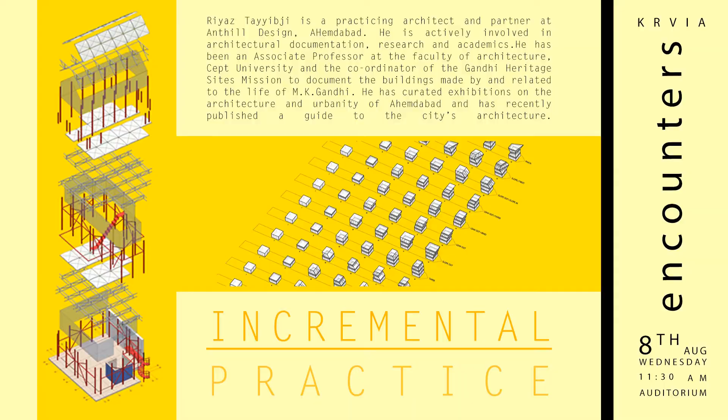With us, Mr. Riyaz Tayyibji. He is a practicing architect and partner at Anthill Design, Ahmedabad. Anthill Design is an architectural design firm based in Ahmedabad. It has built across India in a large variety of places with different character, culture and landscape. It is deeply involved in the design of buildings that belong to the place where they are built and emerge from the specific patterns of how they are to be used.

Riyaz has been instrumental in rooting the firm's practice in the documentation and research of architecture and urbanity. He is also currently conducting bridge studio faculty for the 5th year. I now invite Mr. Riyaz Tayyibji for the presentation. Welcome to KRVIA.

From guys I know very well. Thank you so much for this invitation. It's a pleasure to be here. I've been having problems this whole time with formats. You know, it's really funny. I was telling Pinkish that the day after you jhap your class for late submission, that's the day that your file decides to take revenge on you.

Anyway, what I would like to talk to you guys about is a little bit about what we do in our office and the kind of engagements we have. A little bit of background: I graduated from the School of Architecture, CEPT Ahmedabad, before it was a university. About the time that we graduated in the late 90s, there was a shift happening that one could not have known at that time. It was common at CEPT to take 5, 7, maybe 10 years to do your thesis. It wasn't unheard of to take 17.

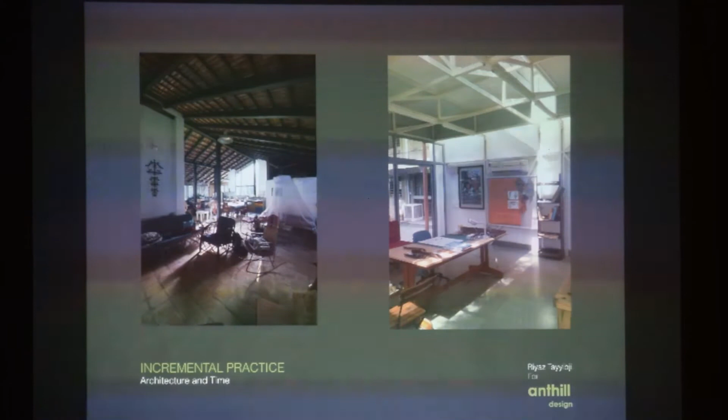And this is all the other architectural values that one still holds good, and is still what you're interested in: the quality of light, the material, the sense of space, all those things I'll take for granted when I'm talking. We all as architects will have our own sensibilities, but those are the essential parts that one is concentrating on, irrespective of how complex the brief is, or what the client's restrictions are. That quality one is still after.

This was how we built initially. Actually, what we did was we built just the first level of increment, that the house, the jhopdi, just became a kind of pavilion. I'll take you to the plan. If you see the organization of the plan, you've got two rooms. You've got the room on the top, and actually just in front. Yes.

So if you look at it, this is the main house. That's an annex added even later. So you've just got one big bedroom and study with a toilet, and then you've got a store here. Originally, this was all open. All of this was veranda. So about 60 to 70% of the house was veranda. And what my mother would do was simply collapse the house into the bedroom, collapse the kitchen into the store, and the house would just remain open. And everything that needed to be locked would go into those two rooms.

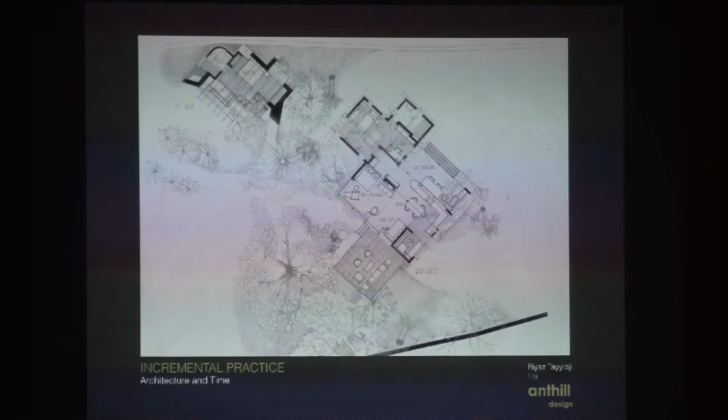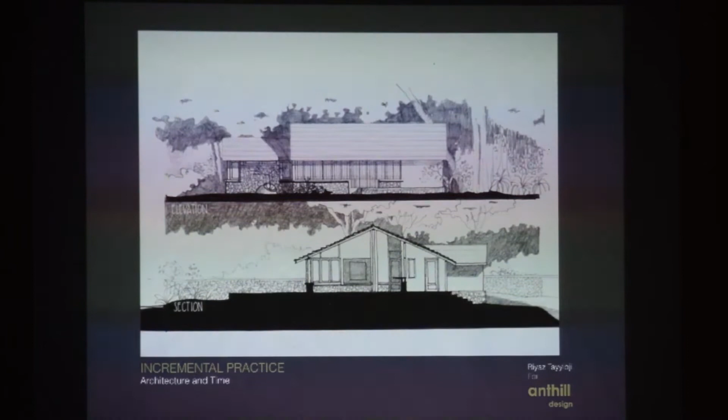And then over time, we added windows, we added doors, we added various other elements, grills now, because there's a lot more density of people in Alibag, therefore security has become an issue. These were the drawings that we made at the time. And we added an annex. So over time, as we've had funds, as investments have fructified, we've kept adding to all of this.

But the kind of sense of space that we were interested in, the kind of construction system that you can see, actually was learning from Ahmedabad. In the old city and in many parts of Bombay also, you find what we call Kulia Pakri, which is like you put steel girders and you simply put Kota stone or Shahabad stone on top. It's a very desi kind of way. So we actually did it with wood and Kadapa stone.

And the entire joinery came out from the fact that I wanted this forest of columns. The forest of columns actually came from the way that the grills and the jhap of the jhopdi was made. The jhap of the jhopdi has this kind of sense of light that comes through it, which I wanted to somehow abstract and bring into the space of the building. Sorry, I think I missed a couple of slides here. But even the kind of grills that we've developed for this project have that sense of a screen.

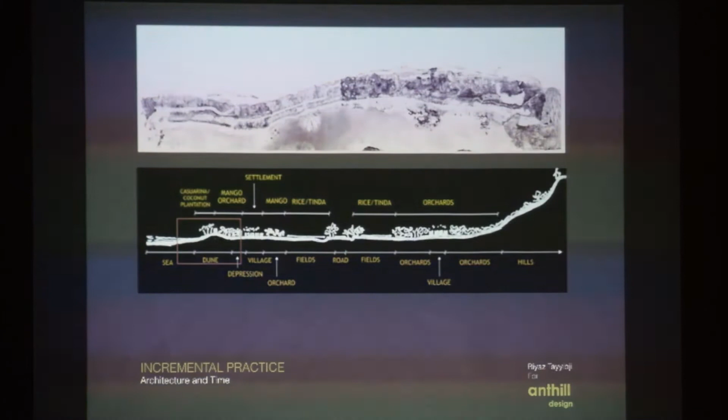And what we found about even the colonial houses that were existing there before us was that the Brits really understood how to site a house, whether it's on the dune, on the flat, in the orchard, or in the plantation, and that the way they site a house makes connections between these. And wherever we've had projects, one of the things that's interested me is to document and research its surrounds during the 1.5 or 2 years that we are doing a project there. So you will see this both here and in the other projects that we do.

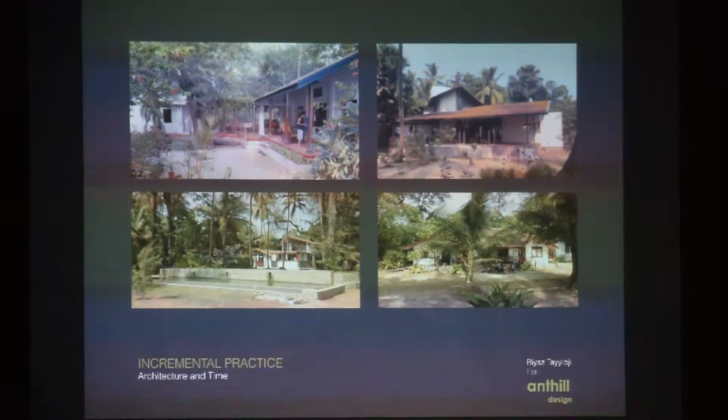And yet, I don't have the time here to get into detail. Each of these is a development of that particular idea of the verticality, the forest, the sense of light, and of course the tectonic details of how you put two materials together. So when I'm talking of incrementality, I'm talking about doing little bits. You're doing things at the level of detail, at the level of the plan of the house, at the level of the landscape, you're engaging in different ways. Not all of it makes sense at that time, you're just following an interest, and you're beginning to see this pattern come together, at least for you.

And you might ask what's the relationship of incrementality with something like, let's say, infrastructure, or something that's not necessarily domestic. And we were also asking that question, whether beyond the domestic you can really use this idea of doing things bit by bit or layer by layer over time. And this very interesting project came a little bit further south. This is a creek near the village of Thal.

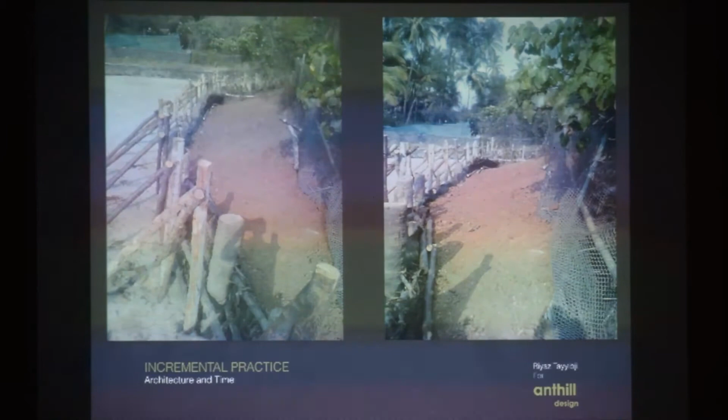So how do you then save the land? So we tried this incremental approach again. What we did was we built this kind of truss, a kind of a fence made with a truss, and we lined it with what you can see is an agri-net and some mesh, and we just grew stuff that then would harden over time.

And unfortunately, I don't have the latest photographs of this. As you can see, we are not very strong on documentation. But we planted mangroves and all kinds of cacti and various kinds of water plants. And now it breaks the force of all of that. So it made us think that it's possible to deal with even larger issues of erosion and things that one would do with very hard materials in this time method, and perhaps there's an ecology and one can develop that way of thinking. So this is where we were.

Now simultaneously with this, in Alibag we are dealing with these light materials, verticals, wood, timber structure, this filigree of columns that I was telling you about. And simultaneously in Udaipur, we had an English client who wanted to build in the early 2000s what he called Eco House. At that time, sustainability was a big buzzword, it still is. But at that time, there's a lot of energy about doing things in this manner. And it's partly at that time that we gave our firm the name Anthill, with all those ecological ideas in mind.

And this project required, I mean, he wanted to know where energy, embodiment, all of that was going into the building. And so we built this with local craftsmen that we started working with. We actually set up the team that constructed a large part of this house. But it was still a very technocratic sustainability that he was interested in. Being British and from Europe, he wanted solar cells and renewable energy, windmills, and all that. A lot of that stuff we didn't implement because we were able to do some of it passively.

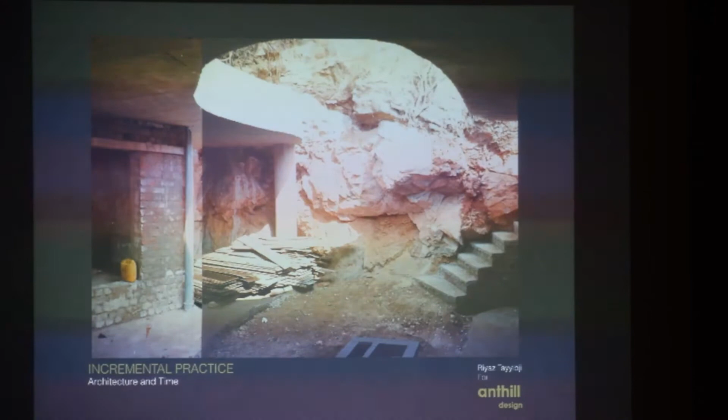So what we did was we played between these very orthogonal buildings, which sit against the rock that we were excavating, and then you get the light and the play through that. And that's actually how the house sits. You've got the servants' quarters over there, you've got this steep hill going up, and that's actually a very interesting device that we designed, implemented by a mechanical engineering company from Bombay, in fact from Vadala. It's a lift that moves vertically and then diagonally up and takes you to the house there.

Moss was about 65 years old. And Mr. Moss started this company for which we did this, called Moss Energy. And it was actually a very interesting story. He and the Maharaja used to play cricket for Cambridge together. And one day Malcolm was standing at the City Palace and complaining, like many firangs do.

At that time there was a diesel-run boat that used to take you from City Palace to the Lake Palace. And it's like, you Indians, you'll screw up everything. You've got this fantastic heritage site and you're all screwing it up with this terrible sound and all. Why don't you at least do some solar boat?

So the Maharaja, no less, saying, you firangs come here, white skin, you'll say anything, you know nothing about the kind of resources we have. If you want to do it, you do it. So this guy took it personally. He had a multi-million-pound chemical company in Surrey, which he sold. He started this Moss Energy and he landed up and decided to live in Udaipur.

And for 5 years, if you do a Google, you'll know there was this solar car rally that used to take place in Rajasthan every year, which was actually run by Malcolm. And in fact his sons, who were 13 and 18 at the time, used to build their own solar cars and take part in the rally. So those are the kind of people we were dealing with.

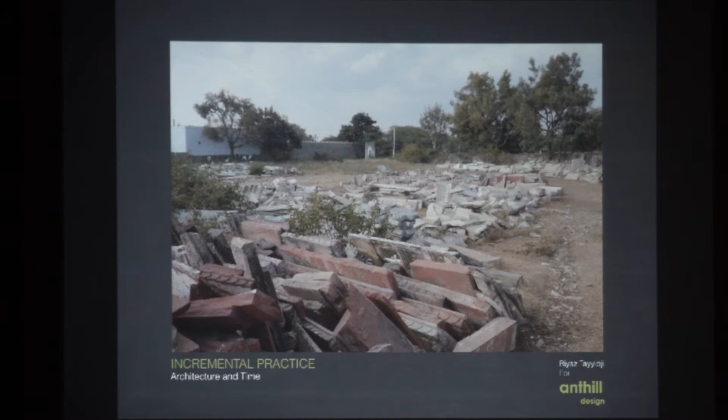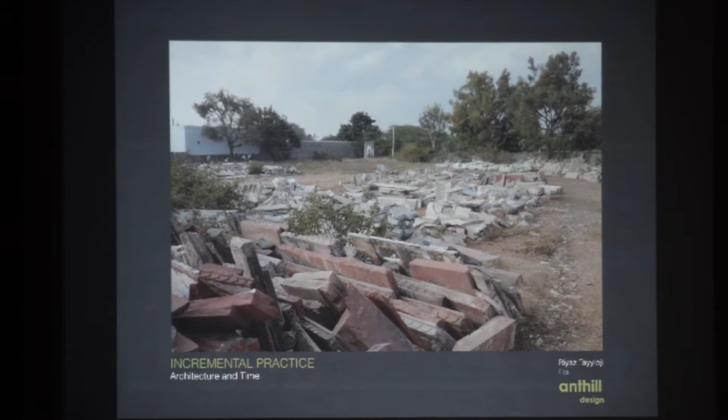There was news that a fort in Madhya Pradesh had fallen, and there was this beautiful patina stone that the government was selling. Some of that stone is about 450 years old. John sent 60 trucks, and we got it all ferried up here. That's the speed at which they move.

Now, when we wanted to do landscape design here, he just bought the whole nursery in Pune and transferred it to our site. So then you're doing mix and match. So then you're like, you guys want to work with Photoshop? This is the real deal, man.

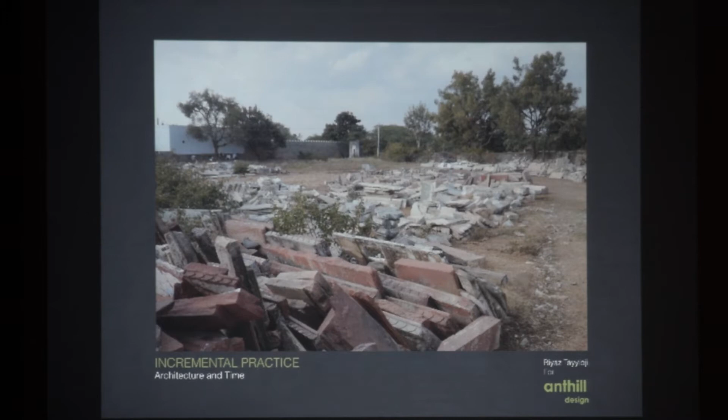So this is some of the material, and a lot of this is now in a nice shed, and there are some elephants which are about 3 meters high, all in one solid block of granite from Mughal times and so on. I'll tell you some of the most surreal things that I've done with John. I've actually had wine in Badshah Akbar's Belgian wine glasses. I'm not kidding you. This is the kind of people, absurd people.

Now what do you do? Do you say you will not work with this? On the other hand, as I told you, I come from CEPT, I do interpretations of Jarokas, I don't do Jarokas. And then you're confronted with this guy who has only Jarokas. And lots of them.

And so his thing was that he also bought very small B and C grade heritage properties from Delhi, all the way down. If you look at the tourist map from Alwar, all the way down to Udaipur. So that if you've got a fancy guy who wants a boutique hotel, you could have 10 stops, see all the great places in Rajasthan, and stay in John's hotel, and you get a package deal for God knows how much.

But what we needed to do was therefore have a hotel or a hospitality project which was modern but used all these old materials. And on some of the sites we had very beautiful old buildings as well, but very small, and therefore not on the radar of the heritage community. So the site that we worked on was a small hunting lodge, which is actually only maybe 15 feet by 20 feet, with a small aula, what they call, and a tower and all of those kinds of things.

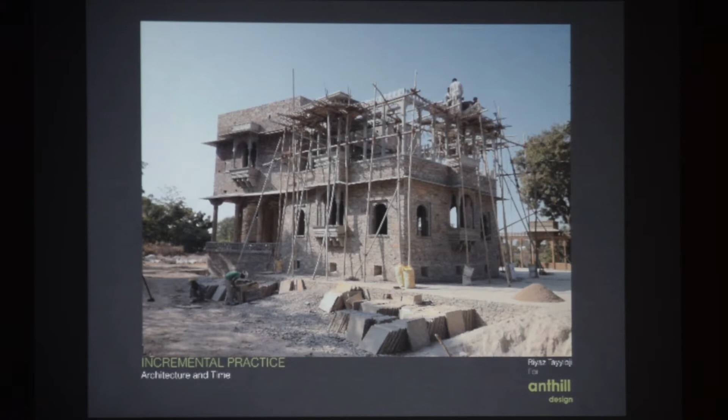And like I said, there's an ethics that's involved here, and I question it all the time, and I'm open to discussion about it, because you have different takes on it. I don't think that I would have been able to talk about a lot of the dimensions of architecture that we do in the office now had we not done this project. So anyway, this is how it's going. But the level of craftsmanship and the level of detail and the level of finesse that we've been able to achieve there has been very, very satisfying.

So this whole composition is actually the entrance to the hotel, and that's it. So it's still going on. We're doing landscape and we're adding rooms to it now. We've got a modular kind of hotel which we can add rooms to every year. So when John has money, we build. When he doesn't have money, we are on hold. So it goes on like this. This is a much more refined version of that incrementality that I was telling you about, because we put in the craft system, we've got the economics worked out with him, we've got a system of drawing this incrementality, not drawing this incrementality in the office, the way that we work. It's got a system of its own.

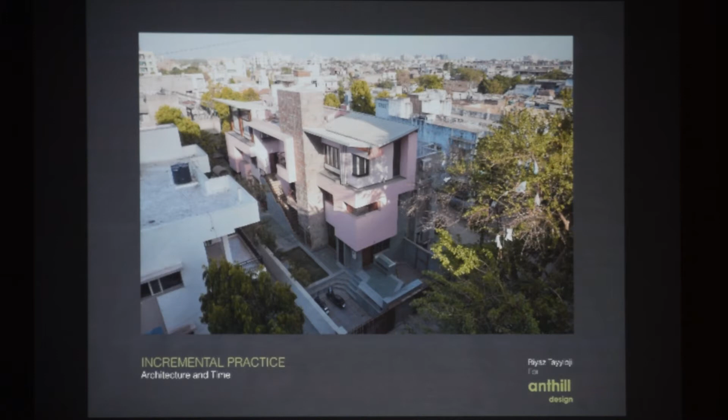Now, this is something that I know quite a few people are interested to know about, this pink house that we did. So simultaneously, we're doing urban projects where the nature of the project cannot afford the kind of incrementality and time that we are talking about. This was a very interesting project, again, which had great feedback, and we discussed it in class yesterday. The client came to us. It's a very, very tight site. It's a long linear site. It's about 27 meters by, I think, 3 plus 6, so 9 meters wide. So you get a footprint of about 21 by 6 in metric terms, and it's a common wall.

So these are Bank of Baroda staff quarters from the 70s. One was broken down because it was too dingy, so light was a very important part of the reason that we were rebuilding the project. The clients were extremely faithful followers of Sathya Sai Baba, and initially the project that came to us was retrofitting the old Bank of Baroda project, and they went to ask Baba about what they should do. And they thought Baba would say, simply rename the house. He said, no, you have to build Sai Naina. And that was the indication for them that the old would not continue, that something new needed to be made.

So we demolished the house. It was nothing to do with architecture. It was a symbolic move. And I was telling people that I'm reasonably agnostic, but they were very close family friends from my wife's side.

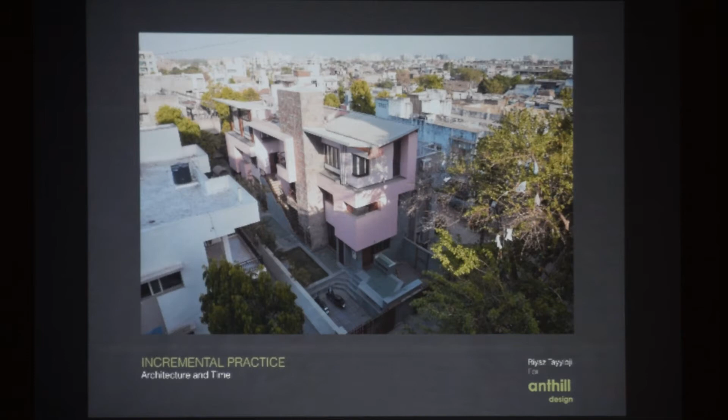And so they went to Baba for the brief as well. And Baba gave us the brief, I kid you not. He gave us five points that we had to follow. And some of them were reasonably sensible. The first one, he said that the plinth must be 5 steps up from the road, which seemed good. It was a low-lying area, there's a slum nearby, there's a lot of water collection. All those things work.

He said that the building must be predominantly baby pink in color. And he said that because the house was to be designed for Naina Aunty, the elevation must have an eye motif in it. And the house must have a lift, and the building must be lighter as it goes up. And the way that he actually told us that the building should be lighter is that the satsang or the bhajan area should be on top.

So it made complete sense in earthquake terms that the higher you go, the lighter it gets. The larger spans are on top, the smaller spans are below. So apart from the eye and the pink, everything made reasonable sense. But there was no question of arguing on this. And this is the crazy thing about the symbolic value of certain things. You can talk about function, you can argue about program, you can even talk about a particular detail in rational terms. This cannot be argued about.

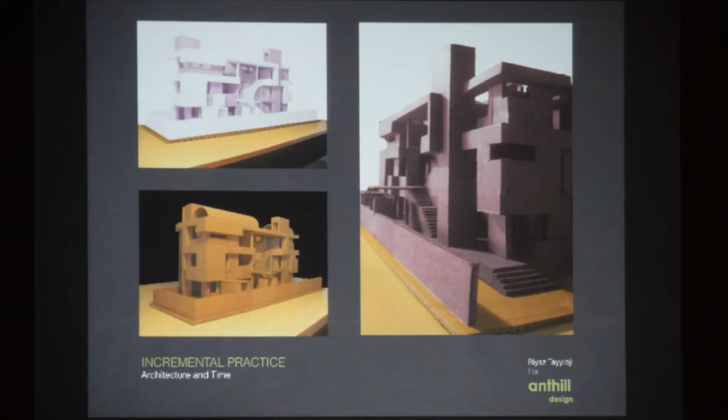The other exercise we did was that we went around Ahmedabad and looked in the neighborhood of our home and our office, and almost 50 to 60% of the buildings were pink. And if you actually look around, even in Bombay, you'll be surprised when you look closely how much pink there is in the world. Anyway, we made all these models, monochrome to start with because that's the only way we know, and then we Photoshopped it to see what we could do.

And just so that we get into the plan, Roma came up with this idea that we are not going to do this motif without it having some kind of functional or programmatic idea behind it. So she took the idea of the eye and the aperture that we were supposed to do and embedded it into the staircase. And because of the 2 flights, it gave us a depth to play with the aperture of the opening.

And then because the section of the staircase shifts, we could use the aperture to bring in light in different ways. So we started looking at the eye as a device for bringing in light rather than just a motif that you stick on the facade. And what you see over here, the staircase and that opening, is what the eye became. The house was actually designed for ground+2, and the entire top part was made out of recycled wood from Alang.

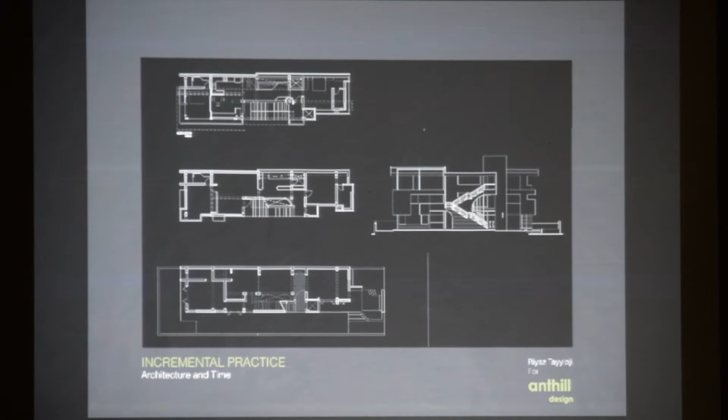And we realized that with the kind of cost we were working with, because we were getting a very nominal fee for this, unless we built it ourselves, A, we would not be able to afford doing the project for our client, and B, the project itself wouldn't be buildable in the cost if we got a full-scale contractor to do it. So that's the eye window that we worked out, and it brings in light in this manner. So this is from inside.

You can see there's this double height slit going up, which is actually the bottom of the top flight of staircase. What we were able to convince them to do is to leave the staircase outside. So you actually go out of the house to go up. I'm just saying, in programmatic terms, that was very, very important.

And yet you have a kind of imagination of the whole house working as one space, even though you can actually partition off each floor as a separate apartment if you wanted to. So they do live as a joint family. So for us, partially the question was, if you're in a joint family, how do you have a sense of the whole house?

But if, let's say, the two sons are living separately, how do they get their sense of privacy and the separateness? If you want to give the top floor out on rent, how do you do that? And the external staircase worked really well for all these kinds of things. Which means you just go out of the main door and up. So internally, everything feels compact and complete, but the house kind of connects.

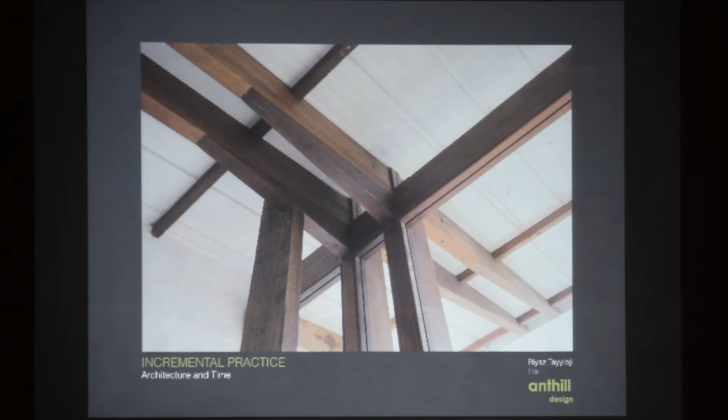But also then, because you have the workshop and your office is in the workshop, you have this level of control on the kind of wood you want to put together, the textures that come together, the way color comes together, the way joinery works. All of that you have a very close contact with. And also you're seeing patterns in the workshop that are then affecting the way that you work and design. And that's how our office looked for a very long time.

So we actually left Center Point, which is when office was house and home, and we went into this industrial area. And it was fantastic because of all the guys around us. Later some of my students started what is called the Clay Club, now doing very well, which was just two galas down. And they were doing stuff with ceramic and all kinds of clay stuff, which you can then plug into and design with.

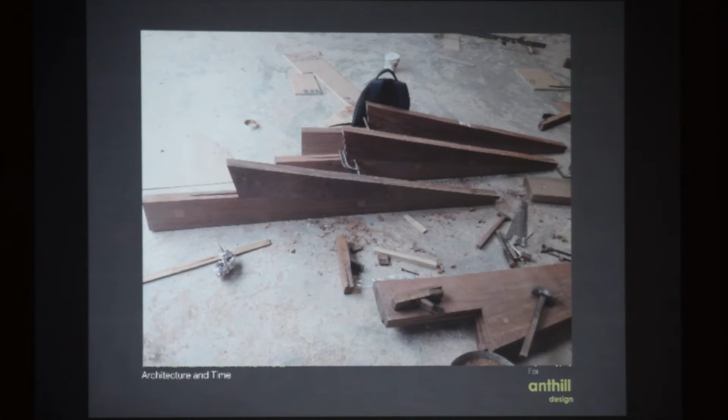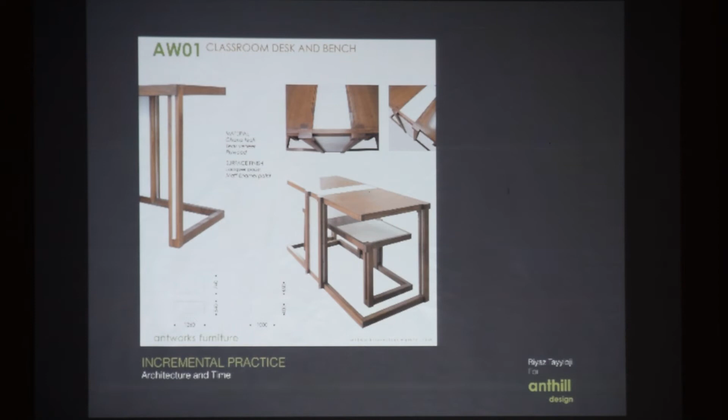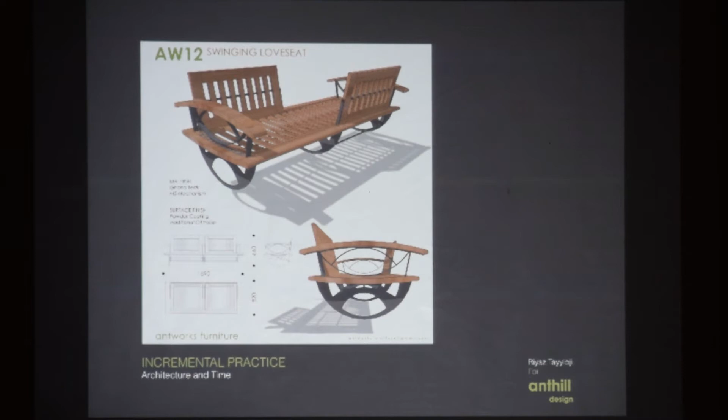The problem was that it started off great. This is actually furniture that we did for NCPA here for the Russian music school. We started cataloging and it became a little bit more of a business. And we made this really interesting jhula where you can flip the backrests in parts so that it becomes a love jhula, like a love seat, all kinds of things. Actually when you think about it, it's a little difficult to swing on, but yeah.

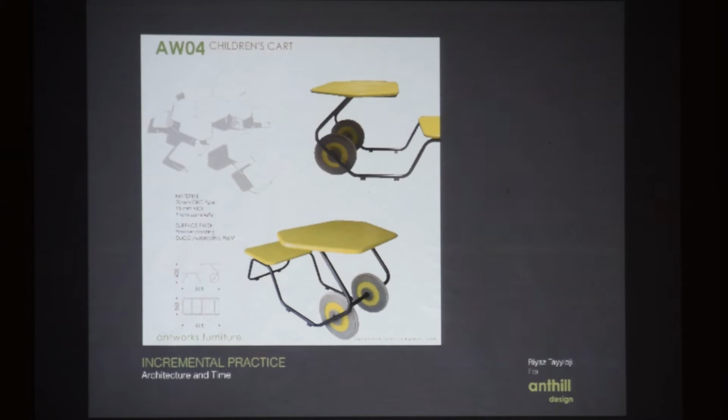And then we did this really wonderful thing which became very well known for a while in schools in Ahmedabad, where we designed this kindergarten cart which is really light, and it allows you to change formats within the classroom. So it gathers around like this colorful flower, and kids can pick it up and take it around and do it themselves. So a 3-year-old can do this, and you can put them in a line and do normal lecture, classroom type seating. So you can see we were having a lot of fun, doing all this kind of stuff. And then reality hit.

On one hand we started so that we could do design. We wanted to design everything that goes into our buildings. The other reason we started was the creative cycle in architecture is very large. If you start a project today, it takes 18 months to 2 years by which the cycle comes around. So let's say I've got an idea, by the time the idea is tested, it's 2 years later. Most likely I've forgotten the idea and forgotten to test it, because we're not very good with post-occupancy. Oh, I remember my concept and I'm going to check it now? Oh, nahi hota hai. I'm very happy, it got built.

So we wanted to introduce a cycle of working which is a little bit faster where you get feedback on your design, and furniture really allowed you to do that. If you're looking at furniture not just in the commercial sense that it's going to look like a Wegner chair or an Eames chair, but actually get into the joinery of it, then there's a lot of learning in detailing, in construction, material technology and tools. You learn your tools. So all of this was very good. But largely the first few times we were doing work for our own projects, where you have a budget and so on.

And then we realized this is not economical. If you really want to make boutique design furniture work, your price range has to go up. Which means you will be charging 3 lakhs for a sofa and not 35,000 or whatever we were charging. And if you're going into that bracket, you need a completely different level of precision, the kind of finesse which you can't do with a craftsman. Because a craftsman will always have the imprint of the hand on it, and there will be that 19-20 as they say. Which doesn't mean it's bad, but your detailing comes from that logic, not from the logic of the machine. So your mind has to shift between craft and machine. That shift was very difficult. I don't think in machining terms.

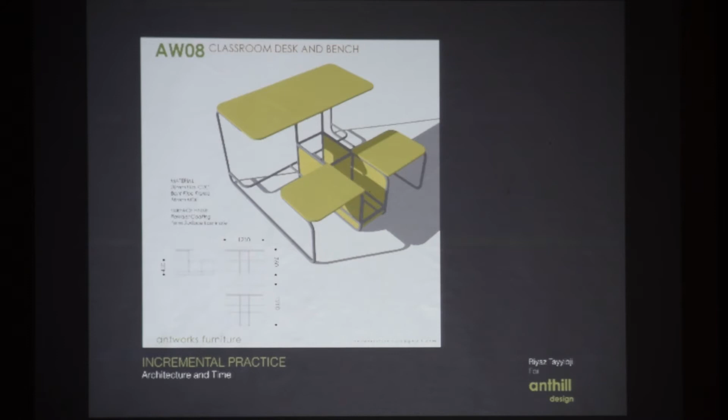And the second thing was the whole point was to be in partnership with the craft. So either you really up your ante in terms of price and make it into a boutique 3 lakh sofa, or you say we'll go into mass. So we said we'll go into mass, and we started doing school furniture. Every time you do school furniture, you get a 100, 200, 300 piece order. What we found over time was we could do about 100 to 120 pieces of furniture a month without compromising the quality.

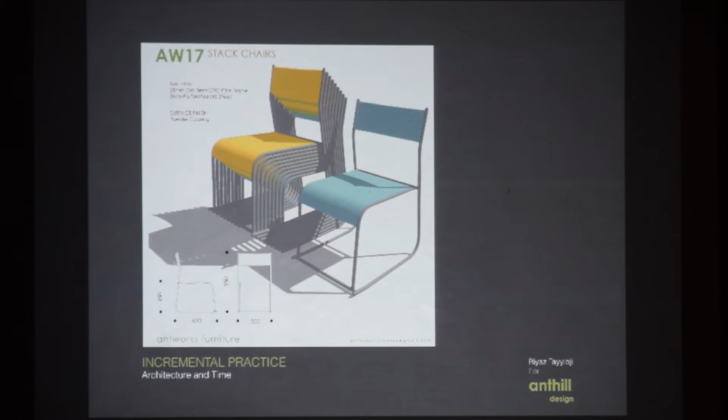But the minute you asked us to do 400 pieces, we were screwed. We just couldn't maintain quality. And then we'd get into all kinds of difficulty in terms of logistics, transport, packing, and those kinds of things really started hurting us. So we started looking at retail clients. And this is one of our retail clients for whom we now do quite a lot of architecture also.

But they were a young tea company based out of Mulund. And we did all their shops, all their furniture. So again, it gives us that kind of mid-range quantum. You don't have to do like 400 pieces of furniture, but you do maybe 30 shops a month, and that means you get 120 pieces of furniture.

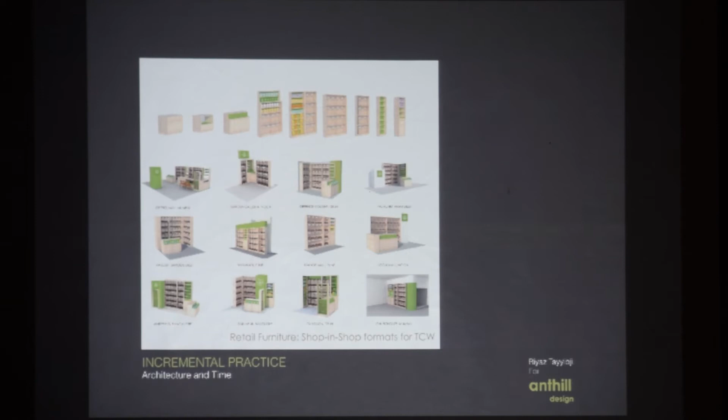So we modularized it. And this was again great learning in terms of dimension, material. We just made modules of furniture that would then go all over the country. We just had to pack and ship to them, and they would become their shop-in-shop stuff. And these became more elaborate as we started going around.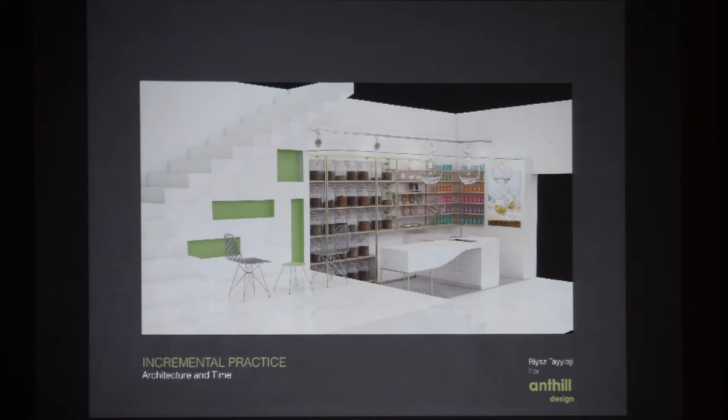And this is actually in Bandra. This is their Bandra store that we did, and this is what it looks like. This is in Nature's Basket. So we started getting into all this kind of retail design and coming out of furniture. And then of course we could do really, really fine, detailed stuff when the budgets

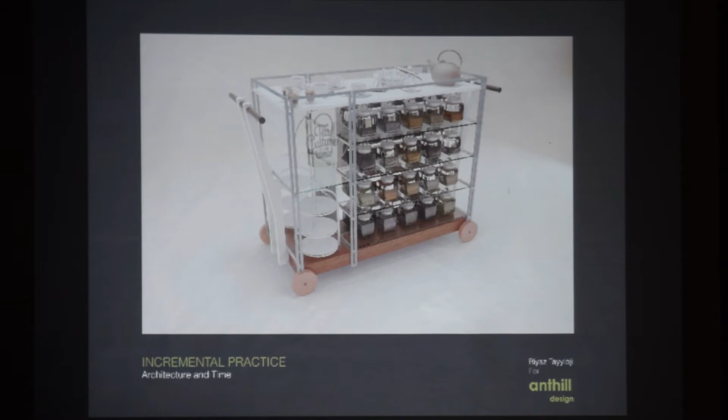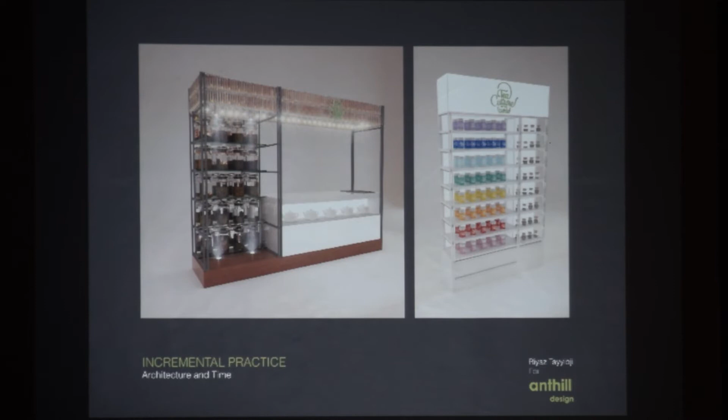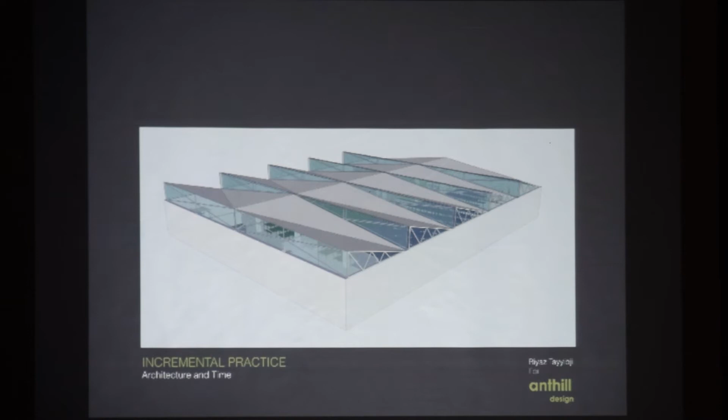And this is stuff that we made for the Oberoi in Delhi, where they have their tea displays. And then for the international airport. And their office, which was made in a similar kind of aesthetic. This is roof studies that we did for their warehouse in Bhiwandi.

And that brings us to the fact that when you're doing all this, you don't think twice about the fact that you can make. In the 5 years that I did run the workshop, one of the things that changed dramatically is my sense of time in committing to a project. Prior to that, because we were working with craft and with people, if someone wanted a project in 2 weeks' time, I'd just say no, not possible.

At this point in time, this is actually the installation that we did for our Step 12 exhibition. I could do an installation like this in 2.5 weeks. Ready. Drawing, design, model, done, made. That was the speed at which we were doing work at the end of it. The kind of speed that one was willing to exercise was much faster, and that opened up the office in different ways.

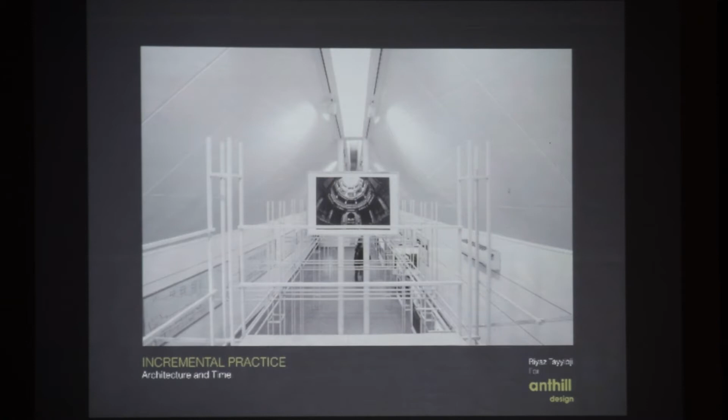So this is an interior that we were then able to do in places like Bombay, which I used to find very difficult to work in precisely because of the speed. This is in Fort, it's a legal office. We made everything in the workshop and shipped it here. Everything from the chairs is designed and made by us and simply fitted here. Only the civil work happened here. The door handles, everything came from there.

We had these funky desks which are all completely curved and chamfered and all of that kind of stuff. And this is an interesting point, because yesterday we were talking in the studio about whether it's possible to practice in the idealistic way that sometimes you leave college with.

Now this is a legal office in which I had to convince the client that we should cut out about 12% of the floor space in Fort. Okay, think about that in terms of property. And I did convince him.

If you're willing to get into a discussion and a dialogue and talk in architectural terms, it is possible. It's not always that it happens, but it happens. But if you're not going to start that conversation, it's not going to happen. And I think, for example, oh, it's not here, but the sense of space you get because of the skylights is very important.

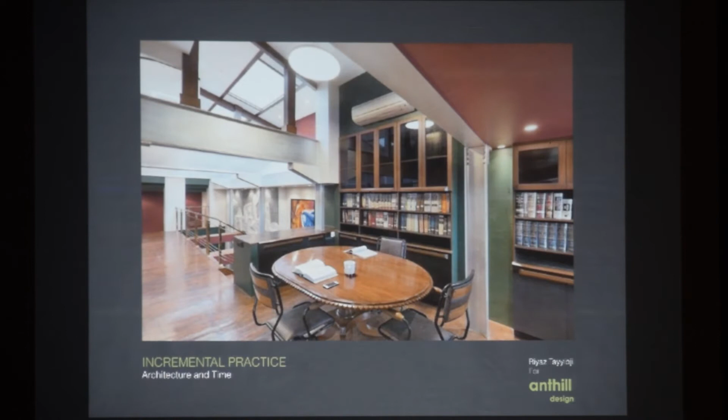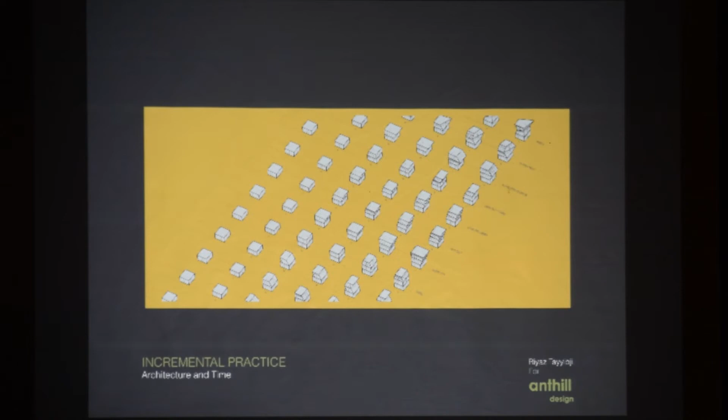Yeah, I don't have the one photograph I wanted to show you, but anyway. So this idea of increment, and you know, you're taking it as it comes. You're being able to deal with a small thing from furniture to landscape. You're looking at something that is cyclic in time and that grows, and it's not static. It's not like this project is over.

And sometimes it's frustrating because you're dealing with the same person for 10 years, and you know they are growing, you're growing, and it becomes a sometimes very tedious kind of relationship. And sometimes it's very, very rewarding. It's a kind of old world patronage kind of system. Not all the work that we do is like this, but this is what I'm putting forward to you today.

Now this is the second trajectory that I mentioned to you, the steel and glass box that we made for the graphic designer. And when we were told that it has to grow over time, we did this kind of matrix of all possible growth. So you will see that that's the initial condition, and each of this is a possible trajectory of growth that we simulated at the beginning of the project.

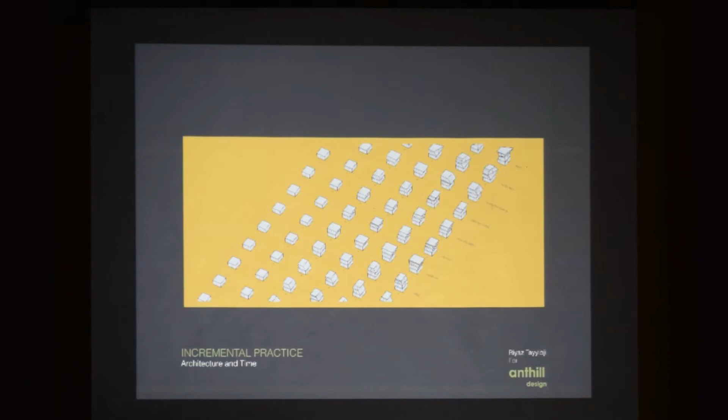So this is now Sarosh, with whom we started practice. He's based out of New York. He presently works for Scofidio and Diller. Earlier he used to work for Herzog and de Meuron. Now he's teaching at Syracuse and Ithaca, and we work over the internet. And there are selected projects like this one which we collaborate on, and there are some which he doesn't have time and we don't have time to work with. But this was certainly one that we wanted to work together on. And this simulation was done across.

And because, like I told you, there was this real need to build this building in a very short period of time, we thought about it componentially, and the entire kind of elemental nature of the building came out of that part of the brief. But one of the most important parts of this design, as you can see, where's the architecture in this? It's largely structure. But the architecture of this was that we wanted the thinnest possible column. This is a 33 by 66 mm column. Okay, and they're designed for G plus 2.

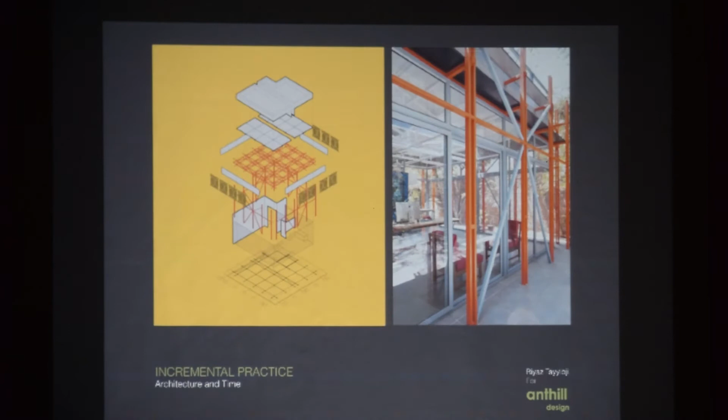Okay, and we sat with the structural engineer, who's a wonderful young guy from Ahmedabad, and we sat with him, with his model, and continued working. And the only breakthrough that made this design possible was the cross bracing required for shear. If you look at the usual design by a structural engineer, you will get the cross in a single bay of the structure. Normally the shear would have been concentrated at these points, and therefore it would have been necessary to make these two columns heavier in order to take the shear.

And then, being architects, we would not have allowed that the columns be different sizes, so we would have standardized all the columns based on the heaviness of those two columns. By distributing the shear across three bays, we were able to reduce it by this much. So the design was in the structure. And the idea was that one should be able to converse with the structural engineer to get the design that one wants. So that conversation was where this entire design hinged on. And you can see that it's all about bringing in light through the structure. And I mean, that's all there is to the design.

There are these funicular concrete shells that are made by a company in Ahmedabad, which are simply placed. So it's that same Pidia Papri construction taken one level ahead, where instead of a plate of Ota stones, there's a concrete plate which has a shell, which allows us then to actually make a broader grid. So you can have a larger span. The only thing that dictated the size of that shell was that two people should be able to lift it up, so that we didn't need a crane on site because there was no crane on site. So it was a panel that weighed about 75 kilos. So based on that, we worked out the grid. So the entire grid comes from there, and everything else is light.

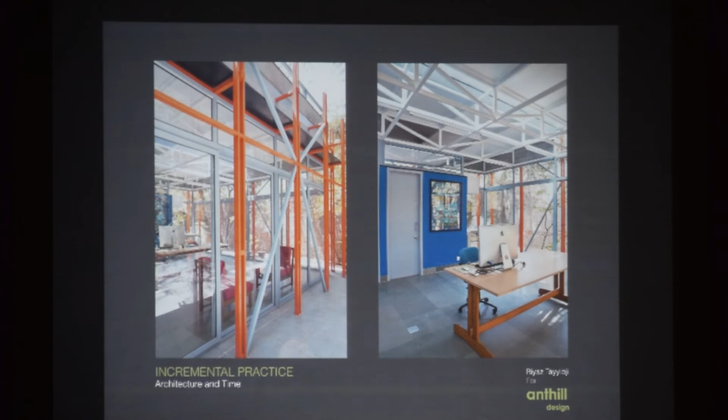And it's something that I would never have visualized. If I hadn't listened to Dan, we would never have realized that this is how it works. He had this intuitive sense that under the forest, under the canopy of the trees, you need that skylight. So anyway, that's how it works. And you can see, when I say that it glows from inside that skylight, the kind of sense that it makes now.

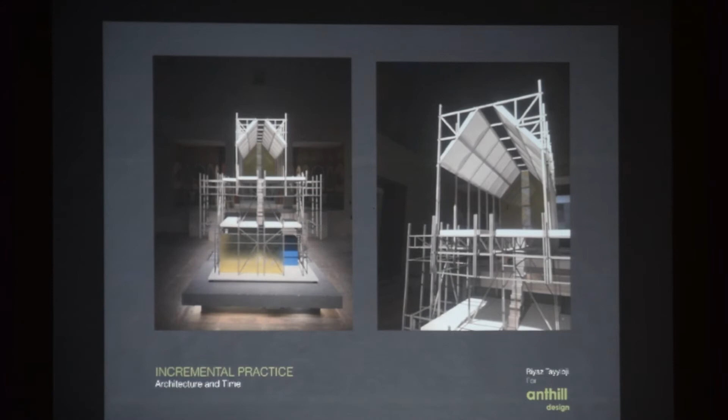And what we were very keen to do was not allow it to grow. This project has become a kind of symbol of the work that our office does, but we do nothing like this. Everyone associates this now with us, because it's also the only project we've published properly. So the point is we wanted to break that image, that the pristine box is not what we were after, but this idea of incrementality, the part being more visible, or the order of the part being stronger than the order of a resolved whole. So that's the way we made the model.

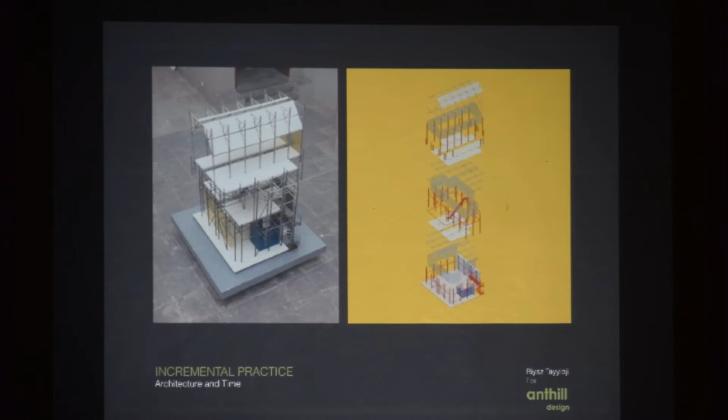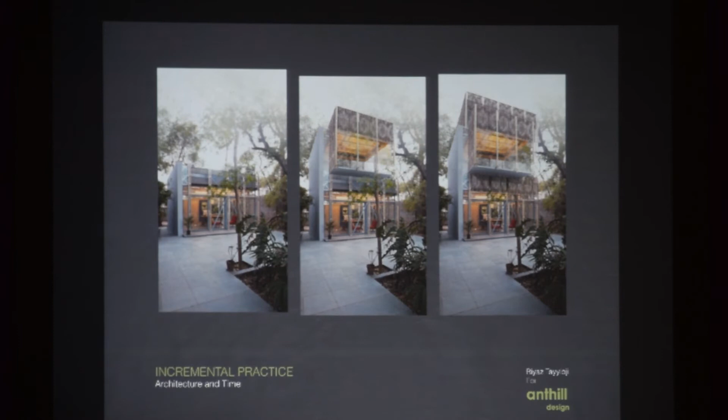And then this was the kind of speculation we did through Photoshop and all of that of how it could grow. This was more realistic. So we put both together and allowed you to imagine how it could be somewhere in the middle. So there's this whole sense of incrementality.

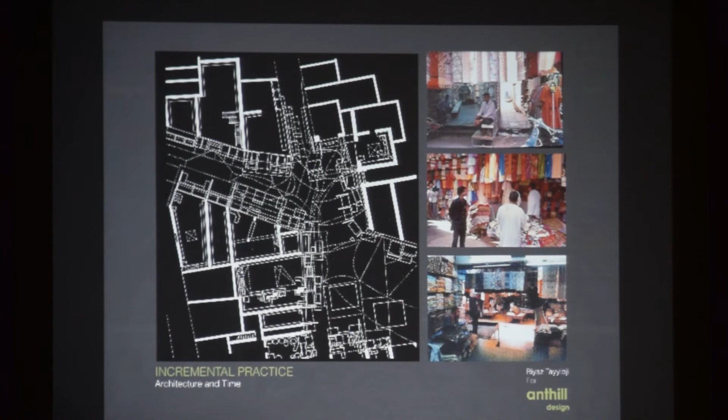And I'll end quickly on this note, going back to my thesis as an undergraduate student, where I was studying the markets of Dhalgarwad in Ahmedabad. It's this cloth market that could be anywhere in an Indian city, and you get this kind of maze of what's happening. And I was intrigued that you could have this street which connects the Khajuri Masjid to the Jami Masjid, which is like saying in Isfahan that this is the market street that connects the main mosques with the bazaars.

So this is the equivalent of the bazaar street, and yet I'm standing in one shop, and this movement across between shops is partially stronger than that street. How do we allow this to happen? How does this kind of encroachment take place where four people who own shops make a kind of department store across public space? This really intrigued me, and I started looking at the way that we look at things.

And of course, we've been so colonized in our way of thinking about cities. You might have read that book called Streets for People, where he says that the idea of a good street lies in its straightness. Spiro Kostof will say that, all these guys will say that. So we've always thought that a straight street is a beautiful street.

And if you look at the building line, the building height, the coordination of fenestrations, that's what gives a European city its character, and that's what's beautiful. And all our bylaws are also based on that basic assumption that there should be a coordination between these things. And the fact that I can see the end of a street will give me perspectival prominence, etc. But you go anywhere in our cities, you see a straight line?

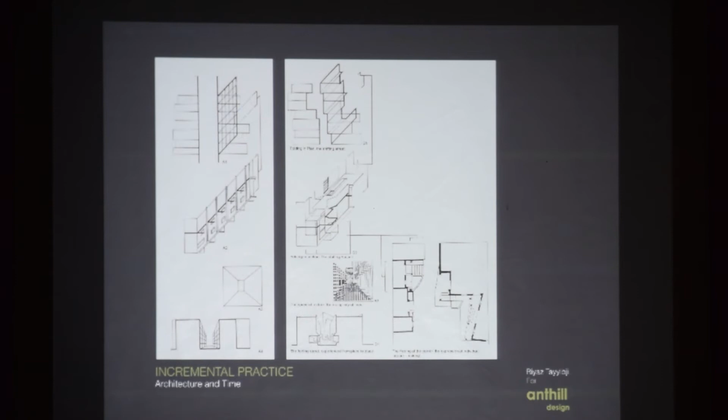And what I figured out during my thesis was the incredible thing about the Indian city: we don't like lines because we love corners. We love corners because corners do things simultaneously. There's a convex corner and a concave corner. When I shake your hand, what do I do to my hand? I make it into a concave corner. When I give you a hug, what do I do with my body? I make it into a concave surface.

When I hit you, what do I do? I make it into a convex surface. If I want to get aggressive, I get convex. If I want to get intimate, I get concave. When I want to go and sit in my corner and read, I go into a concave corner. I don't sit at the edge, right?

So what I realized was that the corner is really important to us because unlike the line, which splits things into public, private, inside, outside, the corner does both at the same time. It makes a convex and a concave corner, and you can't make one without the other. But you can choose which one you want to use.

And the other incredible thing about the corner is when I occupy the corner, and this is that diagram, take any street in Ahmedabad, occupy the corner, you get two more corners at a smaller scale. Occupy those corners, so imagine that there's a shop, then you get the chai wala, and then at the smaller scale, the guy with the matka sitting over there.

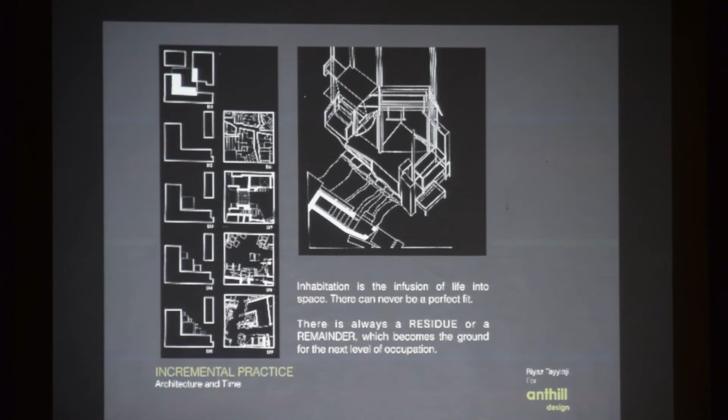So the kind of densities you can get in this system, it can absorb things that when you draw in terms of lines, you can never get. You cannot get those efficiencies because you're not concentrating on what you're designing, you're concentrating on the residue that your design creates. And this is fantastic. For me, there's a whole mathematics to this.

And these are all the shops that I studied as a student. And then you go back and you see that's exactly what these guys are doing. Any line you give them, they're attaching things to it in order to make corners, democratizing urban space, allowing for many more users than that hard straight line that says this belongs to you, this doesn't belong to you.

And in those days, chaos theory and fractal geometry was a big deal. So you started looking at things like Sierpinski's cube, which is finite volume, infinite surface area. And that for me has become a kind of model, an image of the Indian city, that you've got finite volume and infinite surface area.

And you start looking at this line, for example, you might know this is like a kind of model of the coastline. Okay, you can't actually say how long a coastline is. You have to say what is the scale at which you are looking at a coastline. If I look at it at Google Earth, I can draw a straight line down the west coast.

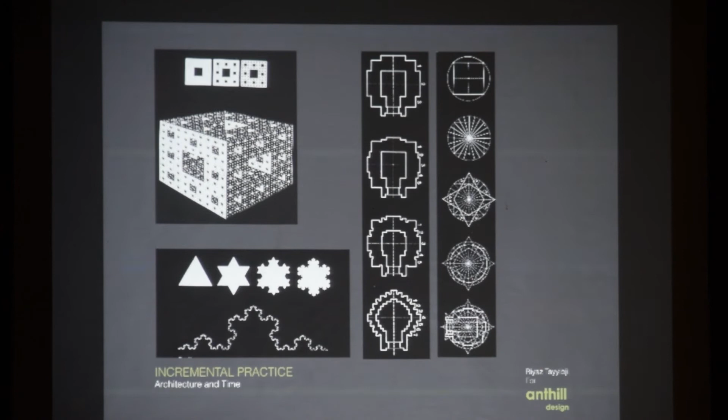But if I zoom in and I start saying Bandra, Bandstand, then that length is infinite. So in some sense it depends. If I zoom into the scale of a crab, that line is just increasing in length. So, I mean, that idea that something has got a finite length is very dubious, which is what all these sciences were talking about.

And I could see this everywhere, whether you were looking at the Lingaraja temple, these are some models made by my history students, or you were looking at Hampi, you could just see this proliferation of surface everywhere. Whether you walk into markets, whether you go to the Sunday market, whether you look at a procession, you see this. So I started realizing that this is an attitude to form. This is not just something that's happening by accident. It's not something that happens only in Ahmedabad. It happens everywhere. You can see this in Bombay, and you can see this in Jodhpur.

But how are we taught to appreciate architecture? That's some bloody model. So now I'm thinking, what is this and what is this? And I'm thinking this is the way that sun is being broken into shade all the time. Whether you've got a carved surface, whatever you got, you're just breaking that surface into more surface. Look at that, more than 50% of this photograph is shadowed.

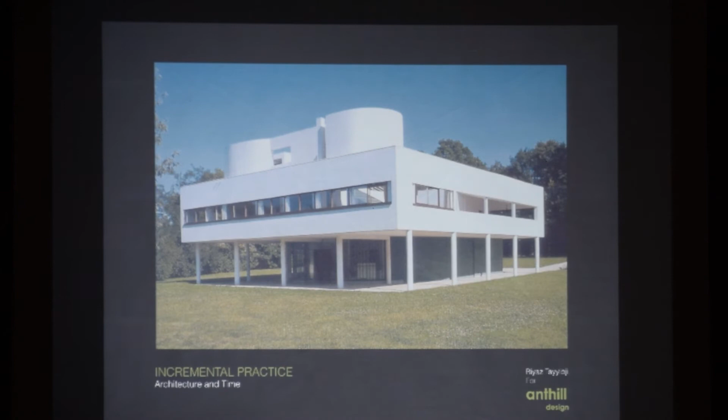And look at that. Can you imagine that in the Indian sun? You get that blurry line on the edge. Okay, and that's what you get. It's a beautiful building. But in that light, I cannot imagine it in this light. And I'm talking again of this shadow.

Okay, why is this sense of the surface so important in the Indian context? And this is a student sketch of mine of the courtyard house in Ahmedabad. You look at the carving in the vertical light that comes into a courtyard in Rajasthan or Ahmedabad, and it's this sense of breaking things into shadow. And then go back to practice.

We designed our own pole house in Gurgaon. So this is a long linear plot, and what we started working with was how do we work this shadow and this idea of breaking surfaces. It's a zone 5. What we've got is a courtyard, and if you look at the plan, the courtyard actually starts rotating as you go up. So the courtyard is this way on the ground floor, like that on the first floor, and opens up on top. So it's a courtyard which actually rotates.

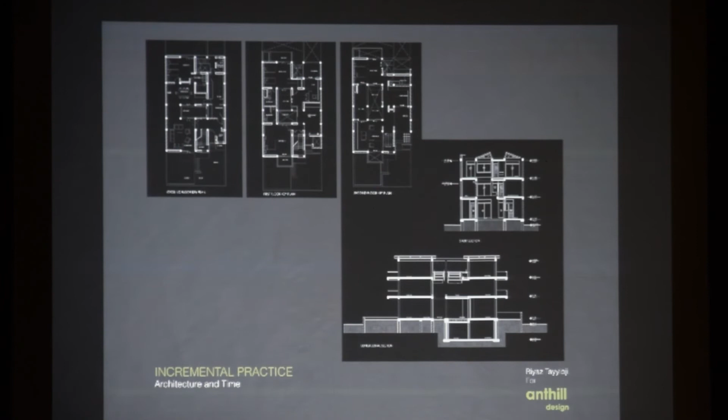So we took that Villa Savoye fellow, and we started realizing that what we wanted to do was make the internal facade a free facade. The outside facade is fixed, but the internal facade of the courtyard is what is free. And that's what we've been playing with in all of this, and various types of transparencies. But it all comes from this idea of increment, part, notion of light, space, the form that I'm talking about, how do you break things up into more and more surfaces. And as you can see, as you go up, it becomes lighter and lighter.

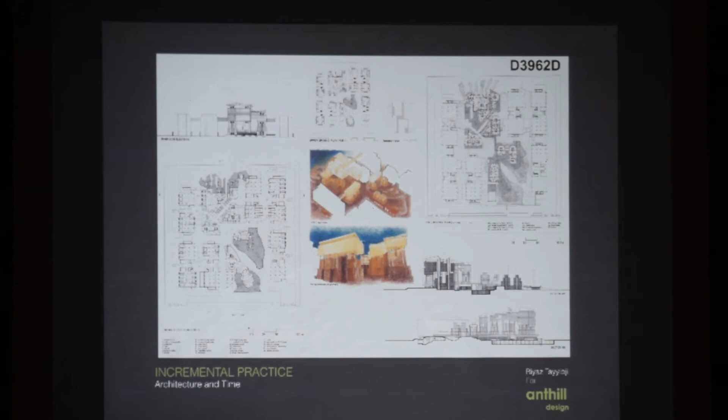These are some of the competitions we do. I'm just going to quickly run through a few of the other things that this way of working allows for. There's research on Ahmedabad. Just as we looked at Alibag, we looked very closely at the city of Ahmedabad. Some of you have seen this drawing because I presented it when I was presenting the studio. How one looks at a city, the assumption that the city is one big block versus the fact that the city is networked with a whole series of villages in the hinterland.

So the way that we actually draw and conceptualize the city is also now more in parts than in one big theme. So I'm realizing at all scales, the idea of bigness is something that is in question here. We love doing things which are of small scale, but many. So I'm beginning to think that if you want to understand Indian urbanity and Indian architecture, you have to understand this concept of many and small together.

That's where we are, and these are researches that led very, very seamlessly into exhibitions. This was part of a Dutch exhibition that was done for the Festival of India in Amsterdam. It was a beautiful provocation put to us by the Dutch Institute, where we had to map 8 projects post-liberalization and then make a kind of projection of what our city would be like based on the ethics and values

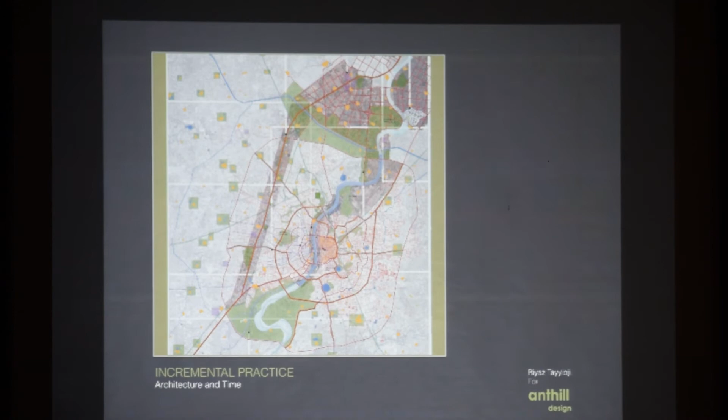of those projects. And the Spanish government sponsored an exhibition of Ahmedabad in a sister city, Valladolid in Spain, which led to more research about how the city grows, settlement type, and so on. And then we did an exhibition that was worked on by us. Some of our clients sponsored it, where we looked at the stepwells of Ahmedabad. And this one now goes into its 3rd edition and opens at Yale at the end of this month.

So here what we realize is everybody knows the stepwell as a kind of singular building. Whereas actually you get many different types of scales, from the individual house to the community to the city as a whole. You get different types of stepwells that are prevalent, and right now we found about 25 of them in the city of Ahmedabad, and they actually constitute a system. It's not just individual buildings. It's a system that regulates surface water with groundwater and settlement pattern.

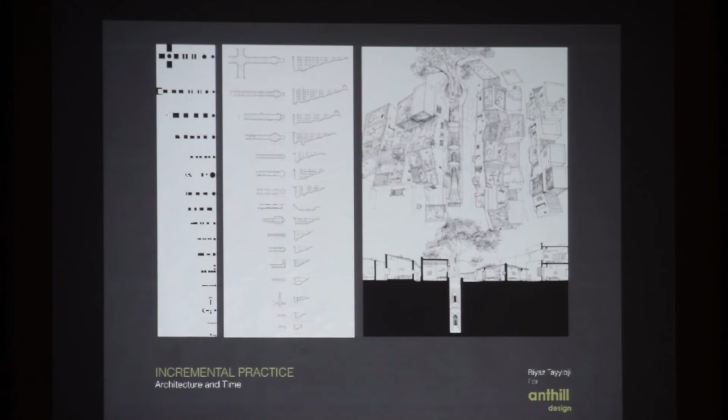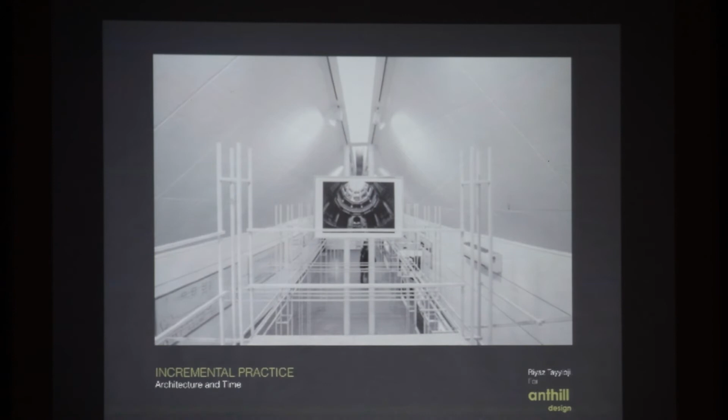It's actually been very, very interesting, because my initial attitude to doing a tourist guide was, what is this? This is really popular stuff after all this hard work. But it was amazing what we realized in this book, because we had to make itineraries, which means there are maps. You make routes for tourists to traverse the city.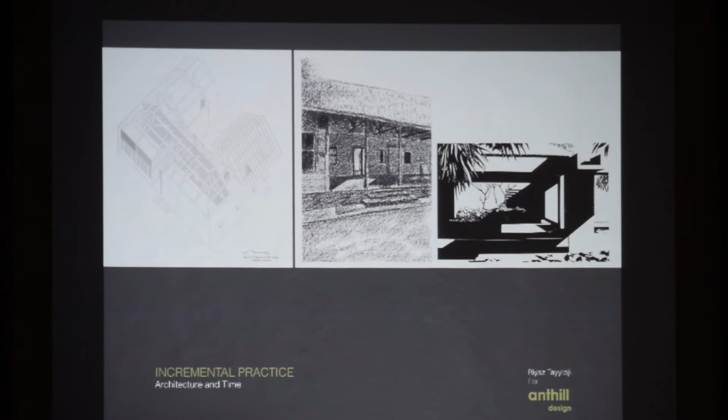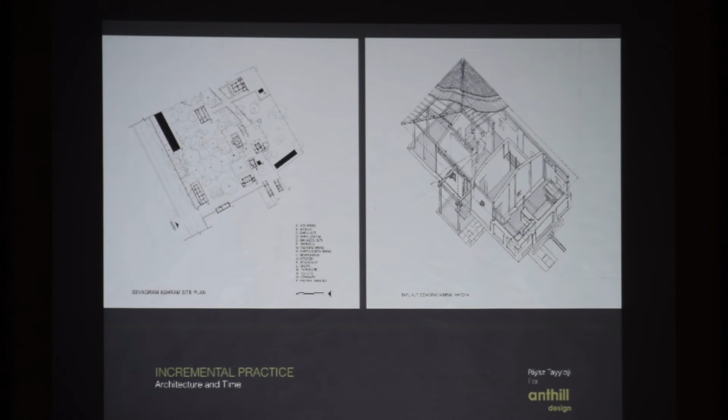harder tectonics. I'm presently looking at Hriday Kunj, which is on the right side, and it's deceptively vernacular in its making. Its organization is astoundingly modern in the way that Gandhi makes place for the individual and the way that Gandhi recalibrates the relationship between building and body. I can't get into it in detail.

But one of the pleasures of being at the Gandhi Ashram was that I got to restore Gandhiji's cycle. I have a hobby of motorcycle restoration, so the director allowed me to restore this. This could not have happened anywhere in the world. A Dutch friend of mine came home one day and said, "What's this old rusty cycle doing in your house?" So I actually got to take Gandhi's cycle home for about a year.

And I worked on it in the studio. And I told him, "That's Gandhiji's cycle." So he just died. He was just like, "What did you say?" And he said, "How can it be just here? You could just take it." I said, "I could." So he said, "Why don't you just buy a Hero and give it back to the ashram and say you restored it?" Anyway, they just can't understand the way that things happen.

So we restored this cycle, and it's incredible. Notice this. Look at that pedal. And there's an incredible story which I have to share to end this. These cycles were made by a company called Freedom Cycles in Rajkot. And this was actually given to the ashram in Rajkot, and Gandhiji brought it to Ahmedabad.

Freedom Cycles didn't construct the full cycle. They packaged it the way Firefox does it and sent it to your village in a box. And you can see the weld marks on the frame. So you got, let's say, this neck piece, you got these tubes, and all you had to do was take it to your village workshop and get that welded. So basically what they did was they just distributed labor.